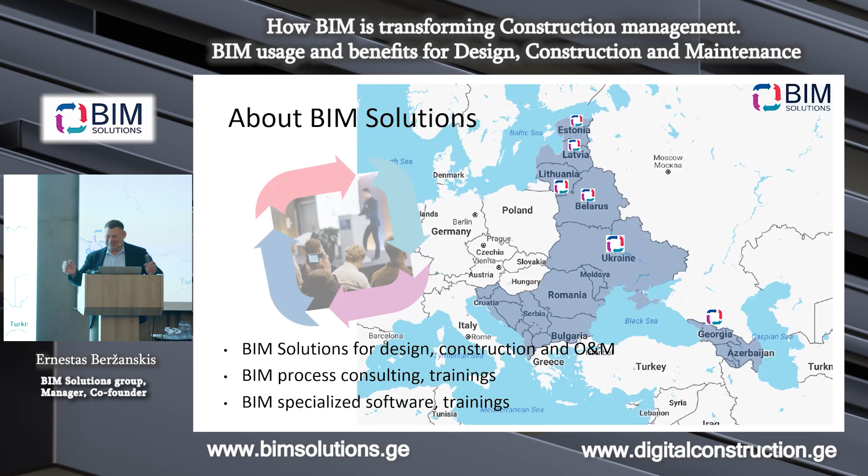Okay, so let's start from one very interesting survey made in Denmark. By the way, it was made 12 years ago. Construction Association, together with the Digital Association, made a survey of construction companies. And the question was: what is the main issue you have in construction? And the results are quite interesting.

The most important issue mentioned by survey participants is communication and collaboration. We've talked a lot about this. The second one, according to importance, was project quality - design project quality. And the third one was planning and work organization - this is a construction company, so it means construction works organization.

You know the Pareto rule, yeah? If we start focusing on the most important things, we can easily achieve 80% of results. So let's focus on the 20% of issues, the most important issues, and we will reach 80% of result. In this logic, you can see project control issues, realization issues, weather and materials quality, and many other kinds of issues. But if we focus on those three - project quality, collaboration and communication, and planning and work organization - probably we will increase efficiency dramatically.

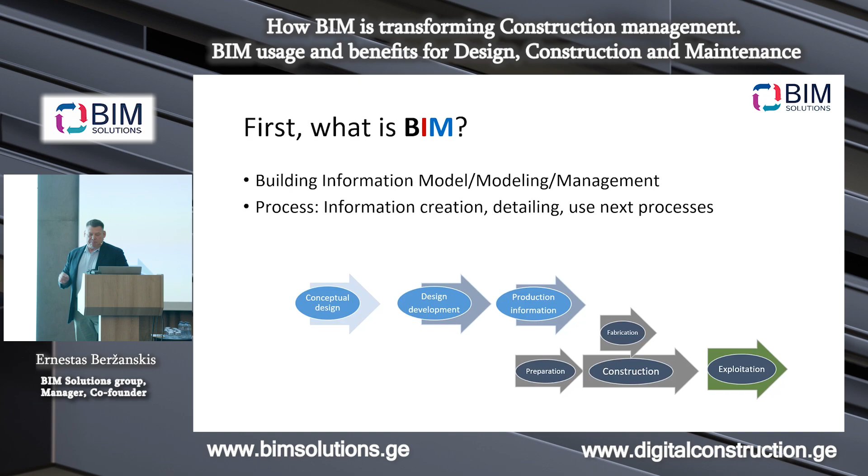But let's touch a little bit, because we promised to tell you BIM benefits. Not everyone probably knows BIM benefits and what BIM is, but let's speak. So, BIM in design, what is that? It's like this puzzle, yeah?

So, first of all, BIM is a visual representation of information, and when architects, structural engineers, MEP engineers are working more in parallel and integrated, in a more parallel and more integrated way.

And BIM information is used for construction, fabrication, and by other project participants for making decisions. Actually, the whole project is a decision-making process. All construction process is a decision-making process, choices. So for decision-making, you just need information. This is the process that supplies decision makers with information. So BIM will be alive only if information is available for everyone, every stakeholder, every information user.

This is very important. This is from our practice in the Baltics. When BIM was only for designers, people said, I don't need your BIM, give me the drawings, give me the classical information. As soon as they start to read BIM and use that information, then the BIM machine will start running.

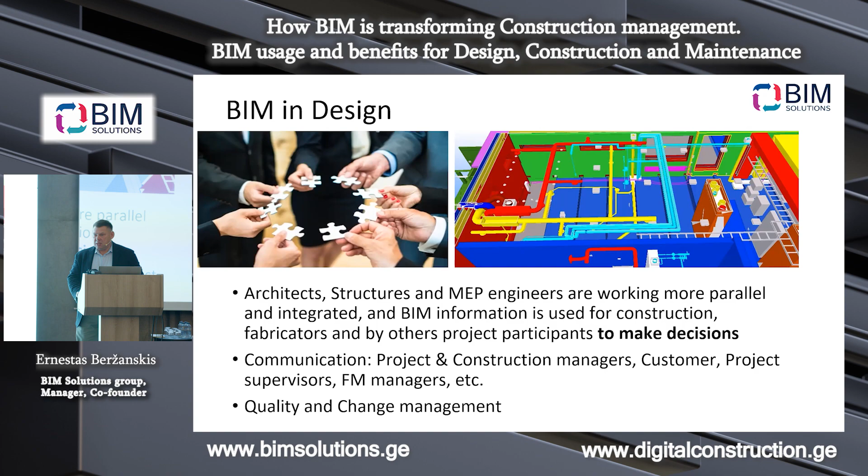How can it look? You saw the abbreviation federated model. So in the Baltics, every architect or structural engineer uses their own tool, whichever is more useful for them. There was the question, what tool? It's up to you. Finally, it should come to a federated model.

A federated model is when everything comes into one system, one coordinated environment. So there are many softwares, to be honest, to create BIM, to create information, and to calculate and detail information. And that's the practice we saw.

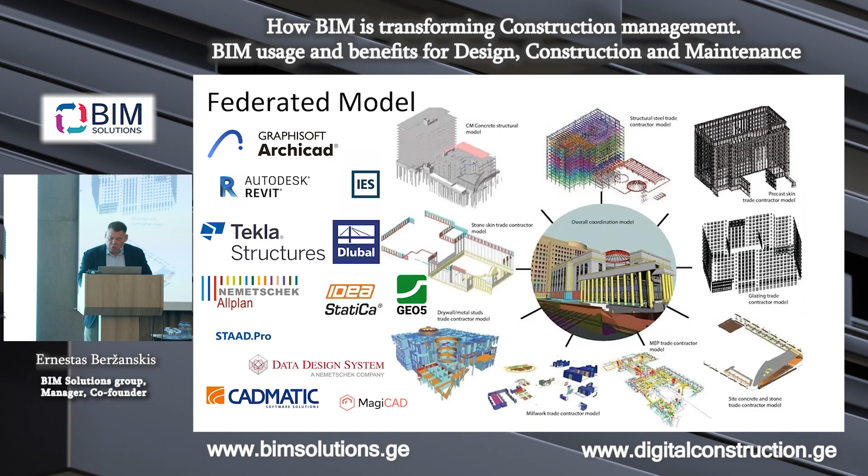But finally, what should be the final result? The final result should be constructible BIM. Why are we doing design? You know that someone will produce, will erect, will construct something, yes? So the purpose of the design and the purpose of using either 2D or BIM is the same: provide information for construction, for fabrication. So we're talking about constructible BIM.

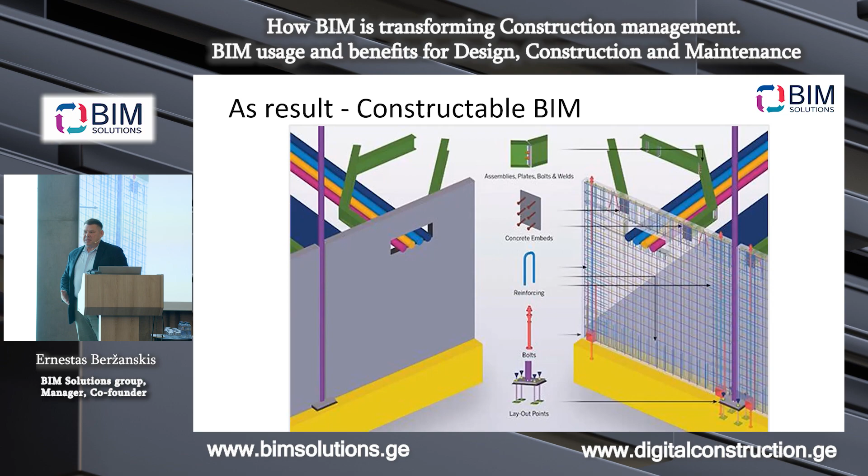Because for example, a site manager has to order rebars for the next week, and he needs to calculate each rebar, how many things we need. Yeah, it's information. We need to know not tons of rebars, we need to calculate precise quantities. So, constructible BIM - what I'd like to say...

And we still, in Lithuania and in the Baltics, have this situation: construction is okay, this is design, we know how to do things, we are a construction company, we will do the project finally. But actually, construction is not interpretation of the project. Construction should be a planned project execution.

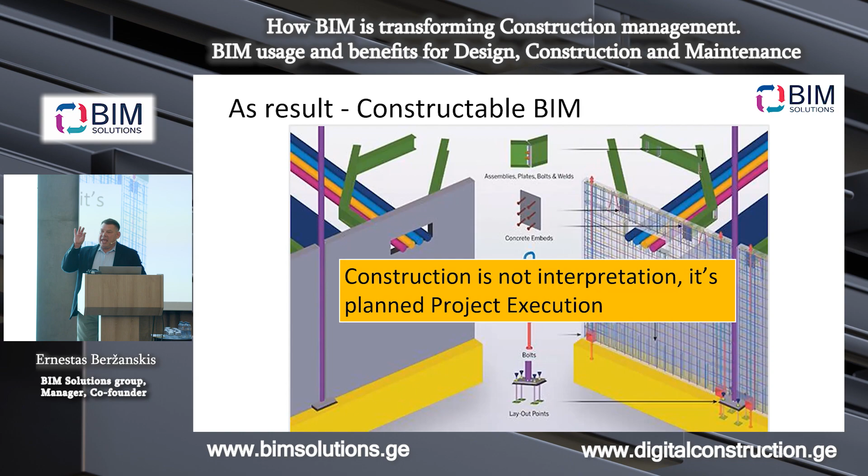Construction companies should not be the heroes, saying 'I saved the project because the project is shit and I'm a hero.' No, just execute the project right. Please execute it as it is in the project. Constructible BIM and construction is not about interpreting the project. Construction is executing the detailed constructible BIM project.

Let's jump to the benefits in the design stage. First of all, three issues: quality, and a much more coordinated design process and result.

Because we are involving all stakeholders in the process, not only designers talking between each other, they're coordinating all solutions in a much more efficient way. So it's much more coordinated, accurate, detailed, and understandable solution to everyone, because a column is a column, whether you see it in Tokyo or in Africa. Everyone can see a column. It's visual, it's understandable.

Accurate quantity, critically needed from the design. How many cables do we need? Approximately, from past experience I know it should be like this, for example. Or how many rebars? Architects calculate it should be something like 15% of the tonnage of the concrete, blah blah blah. Come on, but it's not precise. It's not good for precise costing, maybe enough for budgeting, but not for costing.

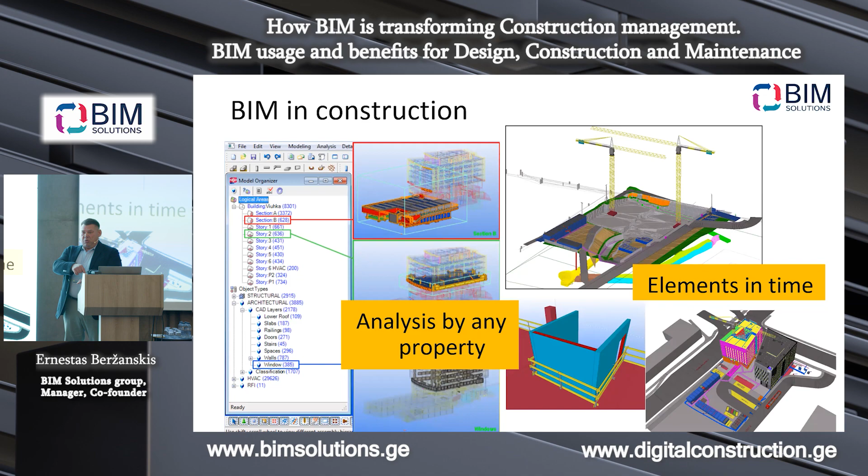And finally, what is construction? It's time. Just imagine those elements running in time. What other things happen in construction? Place management - construction site modeling and place management. Today there is material, tomorrow we will start erection of the poles here - we need to manage the places.

Okay, BIM shortly. BIM data usage in construction. Let's jump to construction. So, for what can we use BIM in construction? First of all, visualize the task. A very simple way, but very, very useful. Just visualize the task you're providing to your workers on site. For them, it will be much simpler to work.

Mobile data on site. Just bring mobile data on site: planchettes, tablets, BIM kiosks, or many other forms. Data on site. Don't go to the office to find information. Access to data on site is very crucial. Issue management from site, very important. All the things that are happening, where we don't know why we're delaying, are happening on site. So we need quick issue management on site and reaction to that.

After that, BIM usage in construction: filtering building elements, as I mentioned, by any properties, and quantity analysis is crucial in the construction process. Cost and job scheduling based on BIM data. BIM data means what things we have, how many resources, additionally adding resources. Progress tracking and reporting from site.

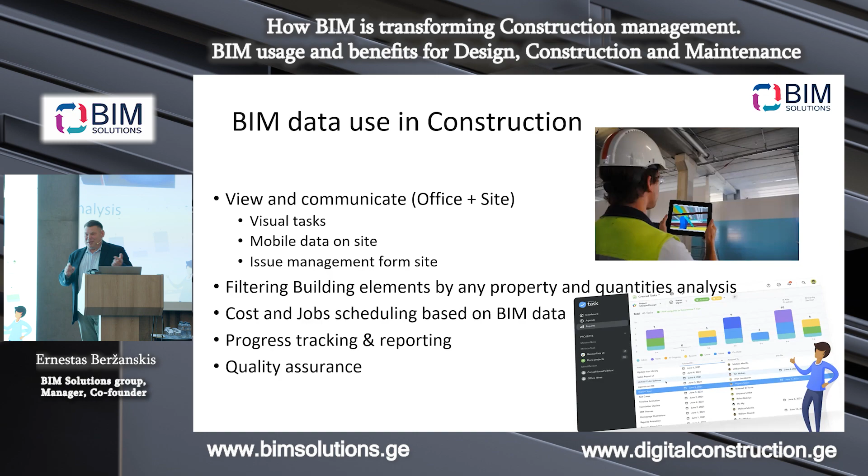This is very important. Sometimes we're talking about scheduling, about planning, but we must not forget that management means plan and measure, plan and measure, plan and measure. If there is no progress reporting, I don't understand why we are doing planning. So if we're doing planning, we need to have a progress reporting system. And quality assurance, definitely, during the construction. I know colleagues from the biggest construction company in the Nordics will say it's not enough, there's safety and many things, but let's focus on the main things.

So, BIM data usage in construction, this is from real projects. Some companies just print what should be done every week visually, and it's helping. By the way, this is from Finland. Some companies just print very complicated places in order to visualize. This is what I told you, visualize.

And to be mobile, to have access and to see what is reality, what should be done, and many other things. Simple things like a site office screen or BIM kiosk, and of course scanning. You heard today about scanning. It's huge potential. It's necessary to have in construction.

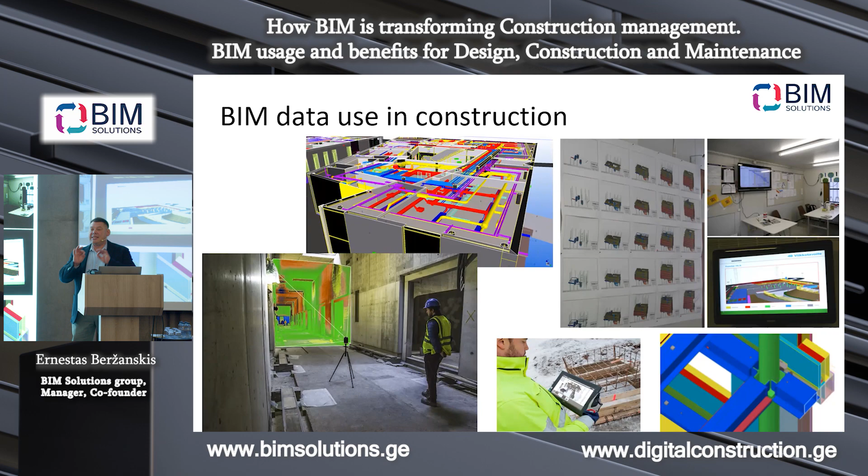Now let's shortly talk about technology for cost and job planning, which is crucial for the construction business. Someone should plan all construction jobs and take into account material supply and resource availability. I saw many companies which just do planning without taking into account material supply possibilities and resource capacity. Not sometimes, 80% of the plan is ruined immediately because you don't know how all the materials will be delivered. You need to agree on that schedule.

So actually, construction should be planned with all supply chain planning. This is the main message. All supply chain planning, it's necessary. Cost planning from budgeting to detailed cost estimation. From budgeting, which is at the beginning, to cost estimation. Purchase and fabrication, meaning supply chain management. It's also very crucial. Sometimes we're forgetting about that.

Or sometimes one person is doing planning and another department is doing purchasing, and they are not talking, they are not synchronizing. They change the construction plan, but the purchasing and logistics plan was left old. Can you imagine what will happen?

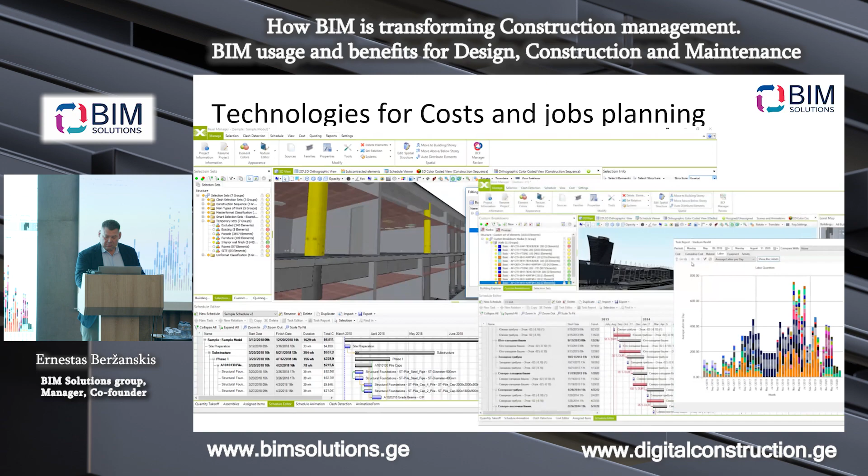Okay, then another very useful example, absolutely useful. Most construction companies in the Baltics are using it nowadays. It's coloring.

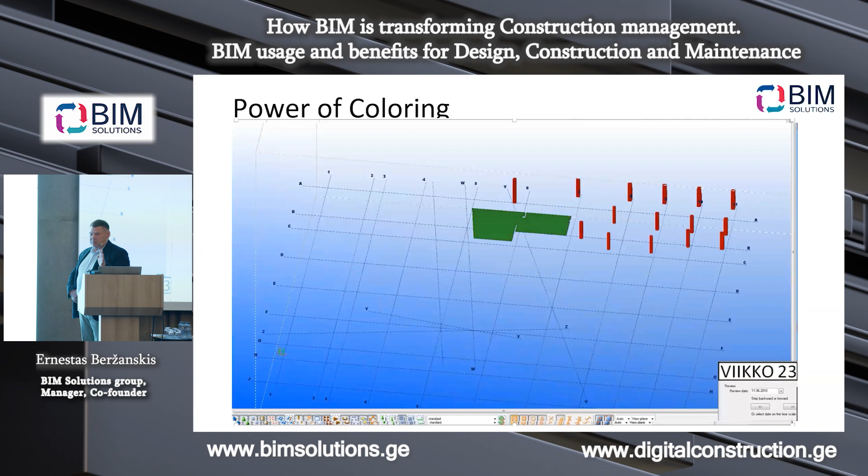Time and status. It's not a fun picture. Why? Can we understand what these colors mean? They're statuses. For example, the first color means I'm at the detailing level, someone doing detailing drawings for fabrication. The second color could mean I'm at the fabrication level. Another color could mean I'm at the erection stage, I mean, I'm on site.

And color can mean many things. Coloring of elements is a powerful tool, a powerful idea or method to manage many things: quality assurance things, logistic things. You can play with the same elements, but for different purposes. For example, I'm a quality manager, I will color my elements in my way. I'm a production manager, I will color my elements in my way.

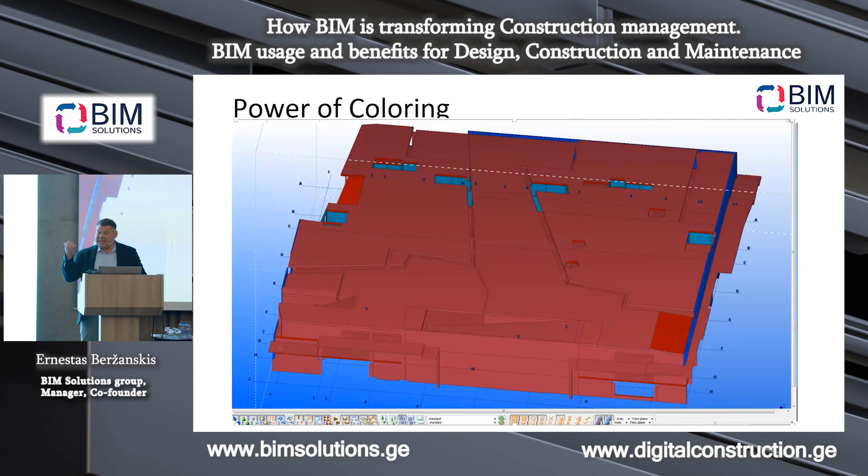And finally we see, okay, good statuses and so on. And it's very easy to report to the customer, to top management, what is happening, where I am in this status. Status management.

Another example shortly. Probably you have this in Georgia, almost. Civil machinery just reading digital data, and they are just going by those data, excavating exactly according to those data. They're smart machines. They just add some smart things on the machinery, and it works. The operator, just in an emergency case, stops or runs it.

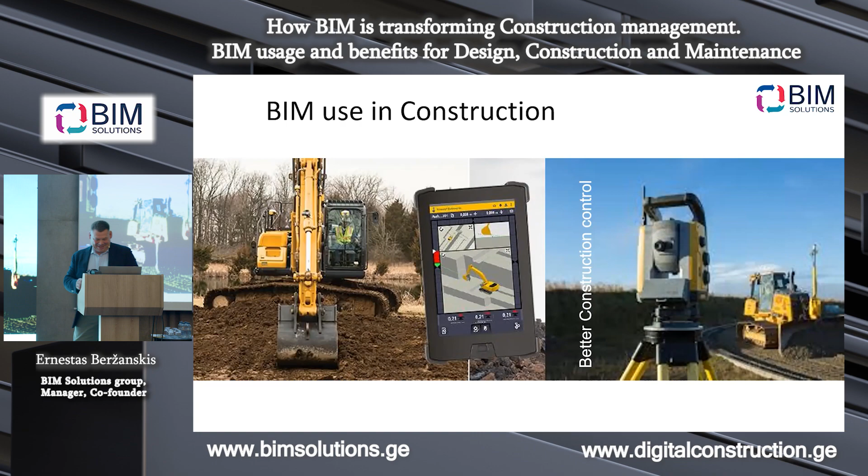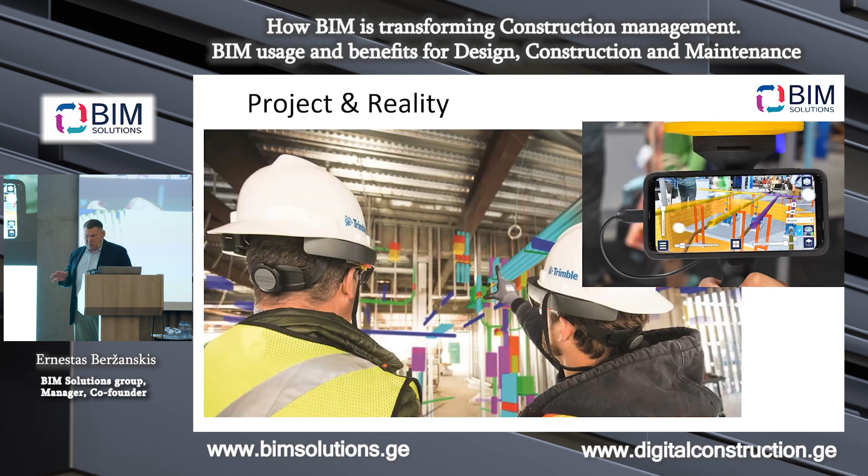Okay. Other things. This one is now developing. I don't say that it's a daily thing, but data usage: mixed reality, project and real environment in one environment. For example, Microsoft and Trimble created technologies, Microsoft HoloLens, which allow you to do that. They're progressing, but maybe it's still not working precisely. But you can see the result, what should be done. And there are many other technologies and platforms to use model and reality.

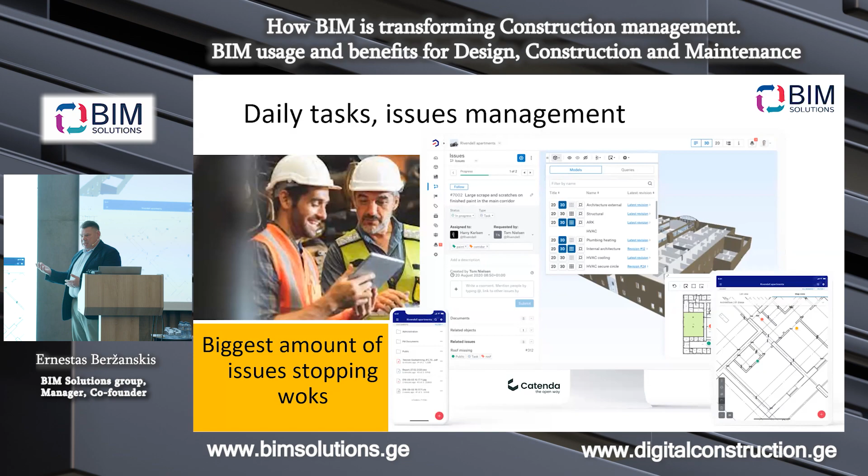Another thing where we are wasting a lot of time, and where we actually sometimes cannot answer: why am I delaying? Why do I have troubles? It's daily tasks, daily issue management. It's crucial. So daily tasks, daily management should be mobile, accessible to everyone. Tools to act and to communicate immediately to someone, to address a task or notes.

Also a good example, checking inspections or other things just by mobile: just put the notes, send to someone, hey, what is that? Or am I accepting that or not? Let's say a quality assurance process. Did I accept or not? Accepted, I just say, okay, it's good.

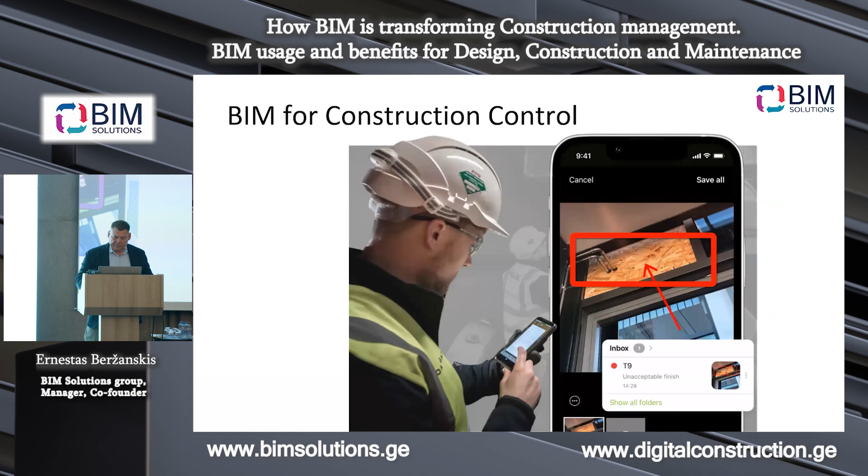And even more. When we find differences between the reality and the documentation, what do we usually do? Nothing. Usually it happens 80% of the time. We're just ignoring it. The project is here and reality is here. It's a difference. And finally, where does this information go? To the maintain and operate stage, to the owners. And they say, oh, what is the document? But the reality is different. This is very important.

And technology allows us to simplify and adjust this process, to change the model according to reality. It's of course a decision-making process. Or maybe I can say, no, you should demolish and build again. It depends on the decision.

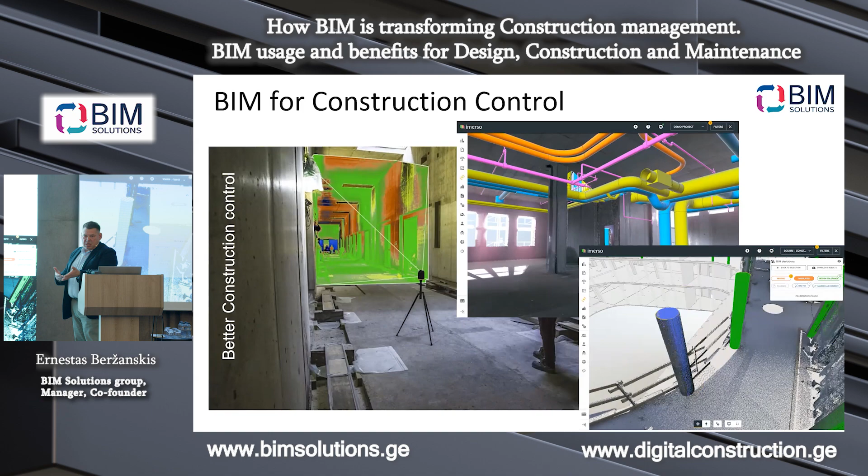Data usage in fabrication. Let's assume this is architecture, communicating with structural engineering, communicating with fabricators, and there is one chain of communication. If the architect changes something but production has started, we cannot make changes anymore. So what do we need to do? For example, lock some elements because they're in production. You cannot change that, that's it.

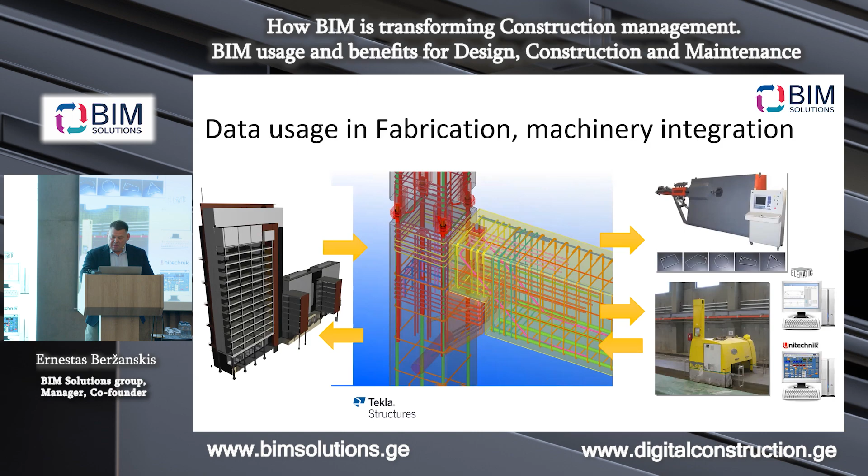Centralized project communication, this is the most important thing I mentioned. Easy and faster to find information. This is the key, because many people speak about a common data environment, and I always ask, is it easy to use? Can you find information like this? If not, throw it away. Because the principle should be: easy and fast to find the information I need now.

For example, if I'm touching the column, I would like to see all related things for this column. Imagine I'm touching a BIM column and I see all related documentation and all related communication about it. And the opposite way, I'm touching a document, please show me all related elements by some criteria. So it must be integrated, otherwise it will be a headache to find information. So bidirectional integration between elements, documents, and tasks or communication is critical. It's very, very important. Otherwise, it will not be a communication platform.

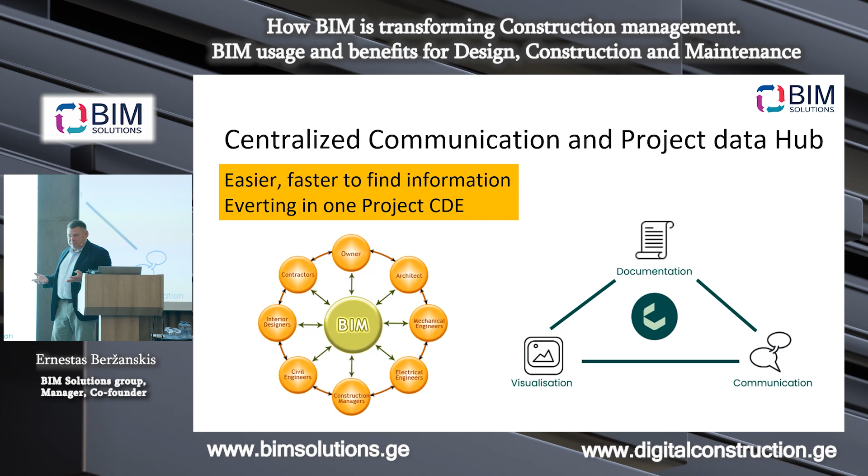Benefits in construction. So, more accurate estimation based on constructible BIM. Based on constructible BIM, a construction company can estimate much better. Not guess how much it will cost, but estimate. Okay, maybe not for the proposal, at least for themselves. What will be the cost to me? Not for the tender, but to me. I need to calculate how much it costs me.

So cost estimation is critical. So precise quantity is necessary. Easy to analyze data by elements, by materials, by many criteria. It's necessary to analyze data by many things. So technology should allow you to do that in an easy way.

And less mistakes, of course, and faster issue management. Less mistakes during construction, because of all this that you saw, and issue management, much faster and better response to issues. It means actual information available to everyone, including the site people. Don't forget about site people. If they will not have information, everything will fail.

Fast change management, coordination on site. Change management, coordination on site. Better collaboration with all project participants for design, for decision making. Because during construction we're also making decisions, yes? Change management means decisions. Or internal decisions which the construction company has to make.

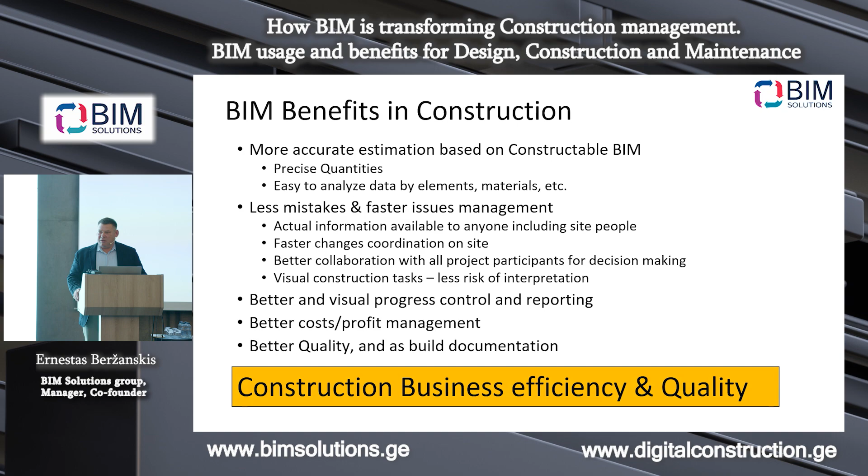The most interesting thing is that 40% of time they're spending waiting, 40%. 40% we are waiting for decisions, waiting for materials, waiting for something. So they saw a picture of themselves. Oh, it's a chance to improve. We can be much more efficient. We can be much more profitable, it means. If Skanska, a well-known company, realized that they waste 40% of time, can you imagine how we can improve our process?

Yeah, and finally, construction. If you would like to have a sustainable business, it means coming back again to the market and wishing that the customer asks you again to do something, you need to be good for the customer. So the key is that the construction company can provide better results, better quality, better information to the property owner or property developer. That is crucial. The customer should be happy to pay you, Mr. Construction Company, money. Make it so that they will be happy to pay you.

Again and again and again. Now shortly about the as-built stage. There are, by the way, many issues in this stage, when we are finishing the construction and passing to the stage in use. In some methodologies they name it in use, but okay, passing to operate and maintain buildings. We start operating buildings. So there are many issues in this field.

And by the way, very interesting statistics for owners and property developers. Actually, project design and construction is only 25% of the whole building life cycle cost. Only. So to focus on those 75%, I think, is crucial to owners and property developers who have property. If you save 1% from this 75, it will be a much bigger amount than, let's say, 10% in construction.

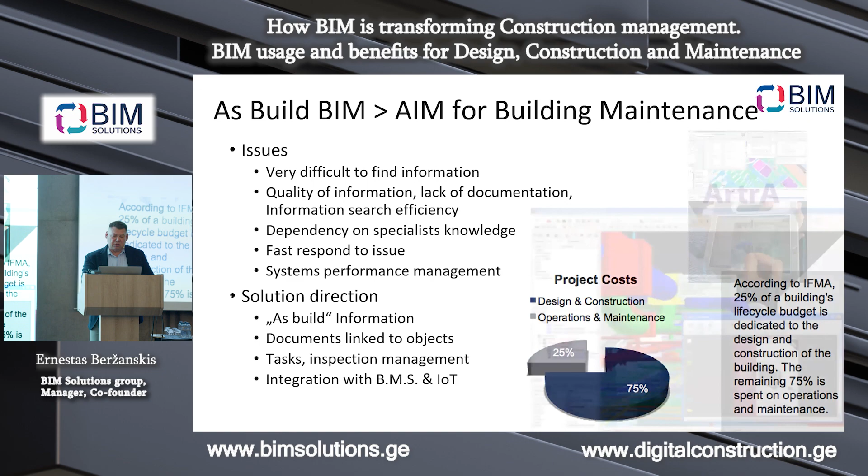The solution direction at least is quality as-built information, minimum documents linked to the object, which will make it much easier for them, task inspection and management, and integration with BMS machinery and IoT, but probably our next colleagues will talk more about that. So nowadays there are technologies that can help in this stage too. But step by step: without a good quality project, you cannot do good quality construction. Without good quality construction and good quality as-built, you cannot pass the right information to the usage stage.

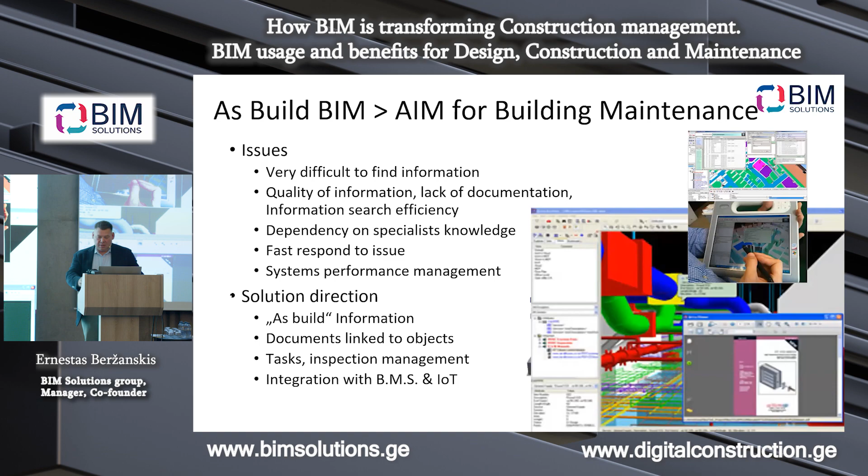That's it. So, for owners during the project: better control, less risk and variance from my plans as owner, as an investor. I don't like variability. I don't like one project being a profit and another a loss. And less total cost, because we know that contractors know how to ask for additional money. You initiate changes, so please pay, for example.

And after construction, good quality building documentation, easy-to-use information, faster response to issues during maintenance. It's very important to owners of buildings, and an opportunity to more efficiently organize operate and maintain processes. And finally, especially for property developers, it's easier to sell property to the final owner, because it's not just a building. And less total cost of those 75% of the life cycle cost. Better ROI, better return on investment, and much more efficient maintenance.